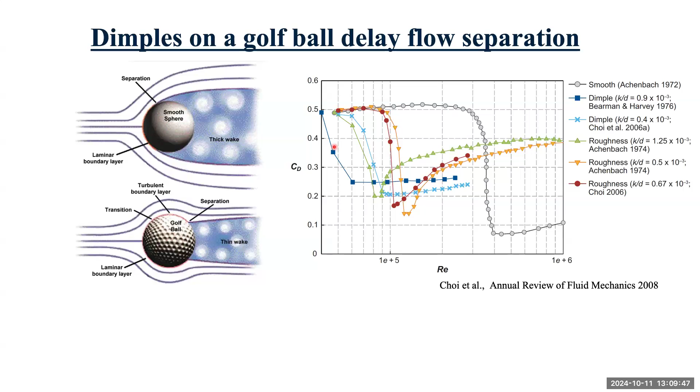So this tells us something. What it tells us is that there is no one size fits all. So if your goal is to minimize drag across a wide range of varying Reynolds number, we need deeper dimples at lower Reynolds number. And as we increase the Reynolds number, we need shallower and shallower dimples, eventually reaching a smooth configuration.

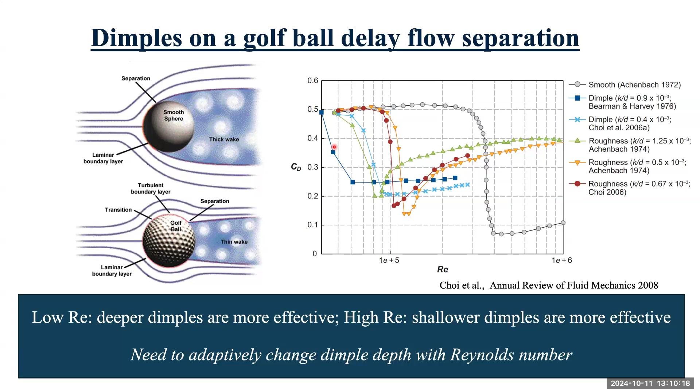But you can see here that we have only 2 data sets, and the dimple depth ratio and the coverage ratio in those 2 studies were matched with a professional golf ball. So we don't have any systematic study reporting the effect of dimple depth ratio. So we need a strategy by which we can change the dimple depth on demand or adaptively that allows us to minimize drag across a varying range of Reynolds number.

So that brings us to the research question to address. Can we develop a strategy to minimize drag on a sphere over a varying range of Reynolds number? And if you're wondering why we're interested in a sphere, it's the most basic prototype of 3D vortex shedding. It has adverse pressure gradient, and you have massive flow separation.

And this is one of the prototypes that the academic community uses for most of the fundamental studies. So we will look at a sphere and see if we can develop a strategy by which we can change the dimple depth on demand or adaptively with flow velocity.

So when I was thinking about this idea at MHL, you might have also noticed there was a NEEX project going on, advised by Professor Mackey, where they were looking at ice breaking.

And you would see those pickleballs that they were using as a surrogate for floating ice everywhere in the towing tank and also in the wind wave tank. So during that time, when I was looking at those pickleballs everywhere at MHL, an idea struck my mind. So I literally took one of those pickleballs, so don't tell Nick's team here or Professor Mackey, and I went to the dollar store and bought a balloon, literally a balloon, a syringe, and a tubing.

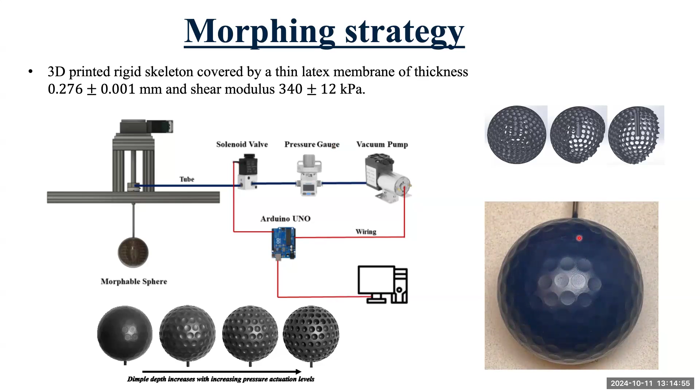So here, what we are seeing is as you increase the depressurization levels, the dimple depth increases. And then in the video on the right, you're seeing that when we increase the depressurization, there were dimples, deeper dimples, and then we released the vacuum pressure, it reverts back to the smooth configuration. And this might look, in theory, really easy to fabricate, but this actually requires a lot of meticulous attention to detail and precision in hand. And that's where Nanda came in, and then he fabricated these models.

Okay, so now we wanted to calibrate this so that we can relate how we can change the dimple depth precisely with the pump activation time here, which is for how long the vacuum pump is on. So we used a 3D laser scanner with a resolution of 5 microns from Professor Steve's lab. And then we have now the calibration. And then by setting the pump actuation time, we can precisely control dimple depth. And here, the precision that we could achieve in dimple depth was 0.01 millimeters.

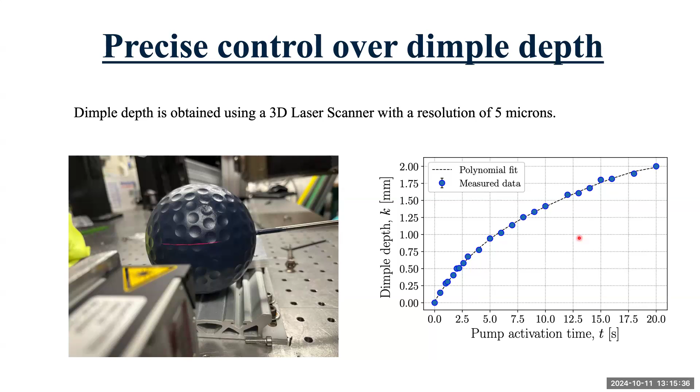So once we had our morphable sphere version 1.0, there will be several versions throughout the talk, we were ready to test it. So grateful to the University of Michigan Aerospace Engineering Department who gave us access to the wind tunnel. So we tested this morphable sphere in the 2 feet by 2 feet subsonic wind tunnel at GFL Labs, where the flow speeds could be varied from 5 meters per second to 22 meters per second. So that gave us Reynolds number varying from 60,000 to 130,000. It's not as big as we would like, but that's the experimental limitation that we had.

And then we varied this dimple depth ratio from 0 to 0.01 in increments of 0.001. And we kept the dimple diameter ratio, so the diameter of the dimple to the diameter of the sphere, fixed, and we matched it with Choi et al. 2006, which is also matched with the real golf ball. And the dimple area coverage ratio in this case was 55.6%. And we did simultaneous force measurement and near wake measurements. We employed 2D particle image velocimetry, and we were looking at an equatorial plane, which was passing through the center of the sphere.

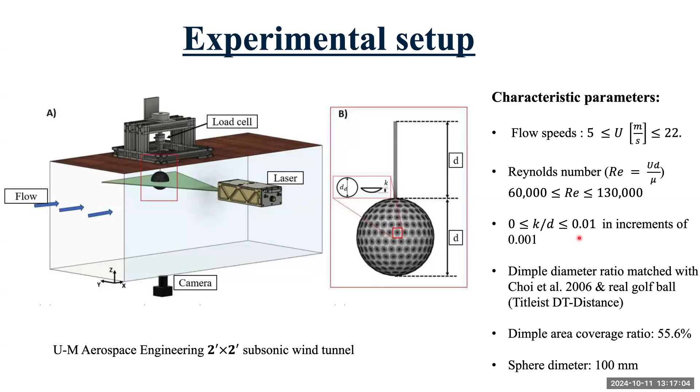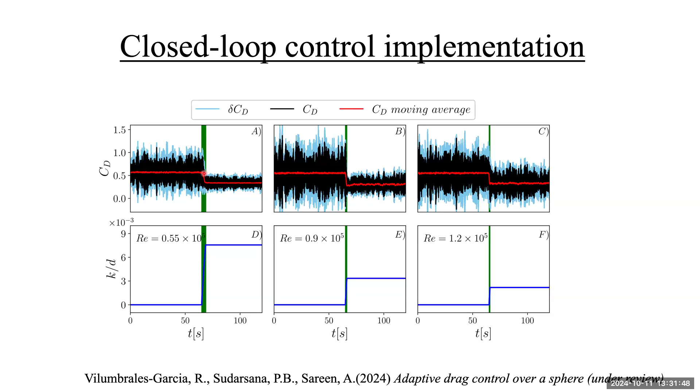Here, how do you know what k/d to use at a certain Reynolds number? So the question was, how do you know the optimal k/d for a certain Reynolds number in this implementation? That comes from this model that we programmed in Arduino, and for this we need to know the Reynolds number. I see. So you performed the experiments for different values of the roughness, from which you extracted the optimal value? Yes, this predictive model. Then you're using this optimal value for the control loop implementation? Yes.

So from the systematic study, we identified the optimal k/d as a function of Reynolds number to minimize drag. This is the control model you need to implement closed loop control. From here, the flow control community can take over. They can stick a pitot tube; whenever there's a velocity change, they will know the velocity and Reynolds number, program this control model in their closed loop approach, and know what k/d to actuate. Because this approach is validated, we know for every k/d what depressurization level we need, so the morphable sphere would actuate that particular k/d.

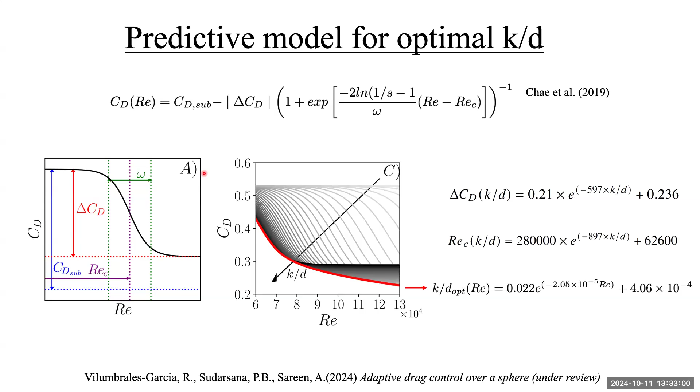So to summarize what we have learned so far, we developed a smart morphing strategy here that allowed us to adaptively change dimple depth with changing flow velocity and also on demand. And we used that to systematically study the effect of dimple depth ratio. And we found that as you increase dimple depth ratio, the critical Reynolds number where you see drag crisis decreases, but the minimum drag coefficient achievable in the post-critical regime actually increases.

And then we used that data to develop a predictive model to relate optimal k/d as a function of Reynolds number to minimize drag, and then used that model in a very proof of concept closed loop control approach over a sphere. So here I've just scratched the surface. This paper is under review, and you can look up the arXiv for more details.

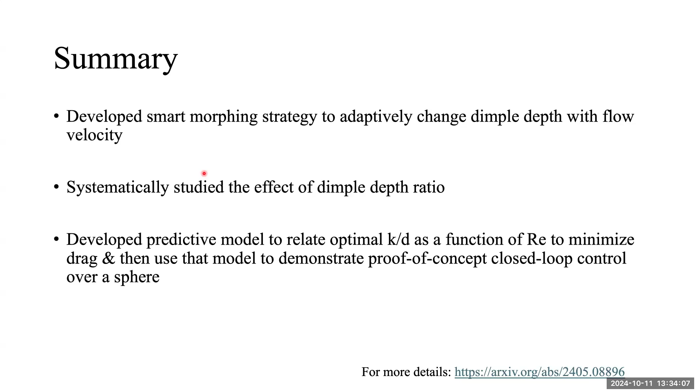So at this stage, we have a toy model at hand, and the team was very excited. What else can we do with it? So the one question that came to our mind was, can we generate lift using this morphing strategy? So in order to start that, I will first ask you, audience, have you seen instances around you where you see lift being generated on a spherical body?

Yes. What are those? Like the insects, when they're flapping their wings, and the birds, they morph their wings, so they generate the lift on the vortex. Yeah, so that's a good mechanism of generating lift for that specific shape. I'm asking about a spherical body. Yesterday, in the Tigers game, there was a curveball. That's what I was getting at.

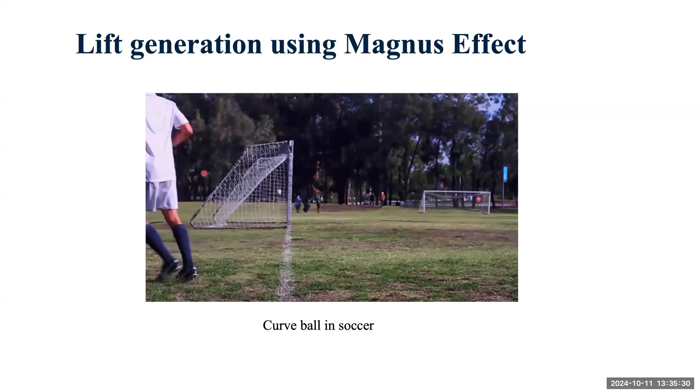Curveball in soccer, right? So we see that in sports all the time, where you impart rotation on a soccer ball in this case, and it dramatically changes trajectory, which is known as curveball in soccer. So this is known as Magnus Effect, right? And another very cool example of Magnus Effect. This video I took from the YouTube channel Veritasium. That's a really good science YouTube channel, by the way.

And what we're looking at is a basketball thrown from Gordon Dam in Tasmania, Australia. So this gentleman has a basketball and he drops it into the dam, into the river. And you see that it pretty much goes straight down with the wind. It sways here and there. And now see what happens when he gives just a little bit of backspin. It goes all the way into the river, just with a little bit of backspin. Did he go down and get it out? I guess no.

So what's happening over here? In order to look at that, I'm going to show you dye visualization videos. This is from an earlier video in a water tunnel. And we're looking at dye visualization at a Reynolds number of 5,000. We're looking at fluorescein dye, which is illuminated using a UV lamp. And alpha is a non-dimensional rotational rate.

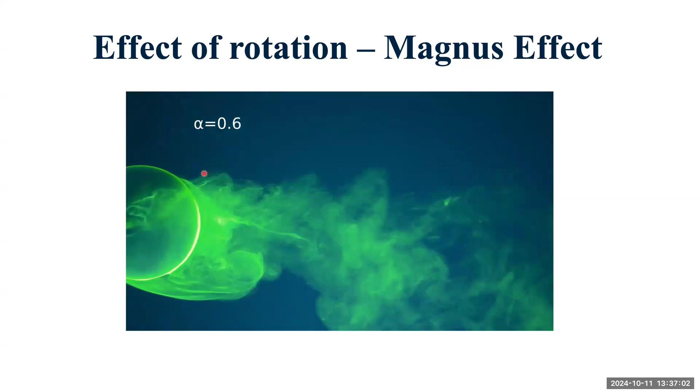So when it's not rotating, the flow is very chaotic. It's three-dimensional, right? And now alpha changes, and it's moving in the clockwise direction. So you see that the wake is deflected downwards. And when you further increase the non-dimensional rotation ratio, the wake deflects even further down. So as we impose rotation, the wake deflects downwards, so we have an equal and opposite force in the other direction. And that is Magnus Effect, and that's what you see in curveball and also in cricket.

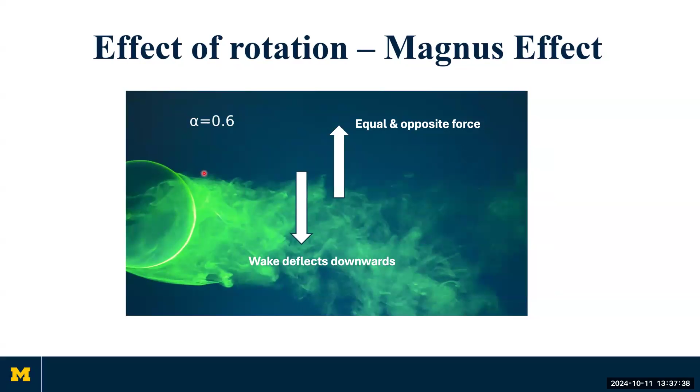So in all these instances, we are creating lift by imparting rotation, right? Now, what we are thinking about is, can we generate lift just by changing the surface texture or topology? And again, we see that in sports. So many cricket fans here? Okay, there are a few. So this is how a professional cricket ball looks, and you see it has a seam.

As it turns out in cricket, swing, which is another word for Magnus Effect, is generated just by this asymmetric seam. The optimal configuration here, from Deshpande et al., published in JFM, is around 10 to 30 degrees. Then the boundary layer that develops at the top surface because of the seam, just like the dimples, transitions into a turbulent boundary layer and we have delay in separation. On the smooth side, where we don't have the seam, we have laminar separation. So the wake is deflected this way. This is the direction of conventional swing.

And interestingly, if you have very high Reynolds number, you can also see inverse Magnus Effect or reverse swing in cricket, where now on the smooth side, the boundary layer transitions to turbulent, and then there's a delay in separation.

And on the top side, we are in the post-critical regime, boundary layer gets thicker, and it starts moving upstream. And now the wake is deflected in the opposite direction from what is predicted with Magnus Effect, and you have reverse swing, right? So we saw that specifically in realm of sports, people have looked at how this asymmetric seam would be able to generate Magnus Effect.

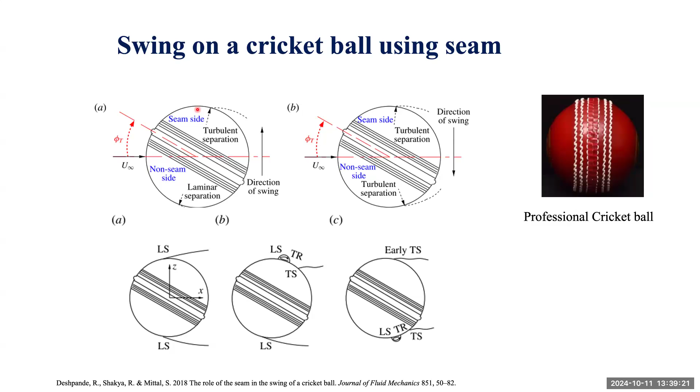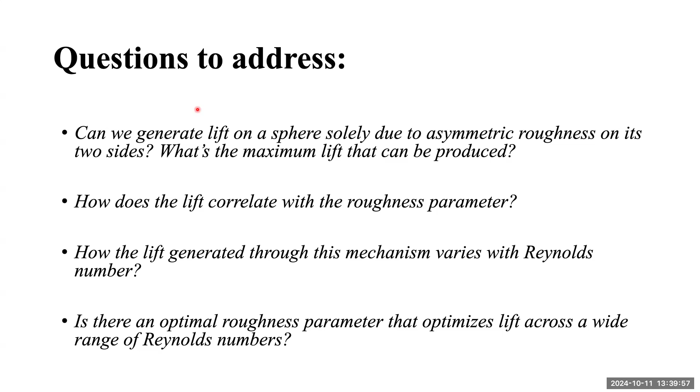So in a sense, what we need for lift is asymmetric boundary layer separation, right? And that leads us to the question, can we generate lift on a sphere solely due to asymmetric roughness on its two sides? And if yes, I mean, the studies on the cricket ball suggest we can, right? What's the maximum lift that you can produce? And how does that lift correlate with the roughness parameter? And how that lift will vary with the Reynolds number. And just like the previous study, do we have an optimal roughness parameter that maximizes lift for a wide range of Reynolds number?

And here comes Smart Morphable Sphere version 2.0. So this version of the Smart Morphable Sphere, so thanks Fernanda for this nice gift. So what we have in the skeleton, half of the skeleton has holes and half is rigid. And just like the previous time, we cover it with a thin latex sheet, and we can control precisely the dimple depth. The only difference is that we are making it rough only on one side, while the other side remains smooth. So this is very similar to that of the asymmetric seam that you see in cricket.

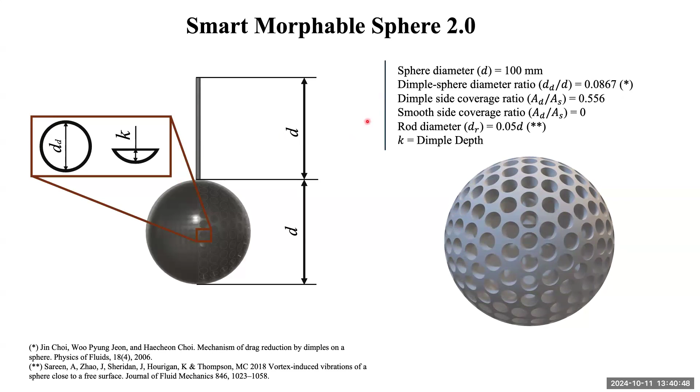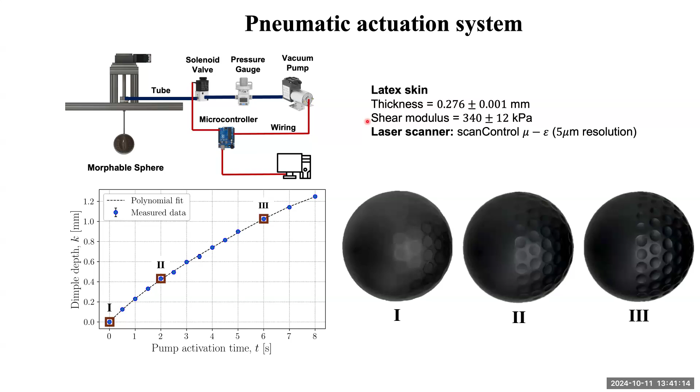And here again, the dimple diameter ratio is matched with professional golf balls. And then we can calibrate it again, just like the last time. And by precisely controlling the pump activation time, we can change the dimple depth. And then we're looking at 3 different instances. This is when you have higher dimple depth, where the activation time is larger. And just like the last time, we have a precision of 0.01 millimeters in this case.

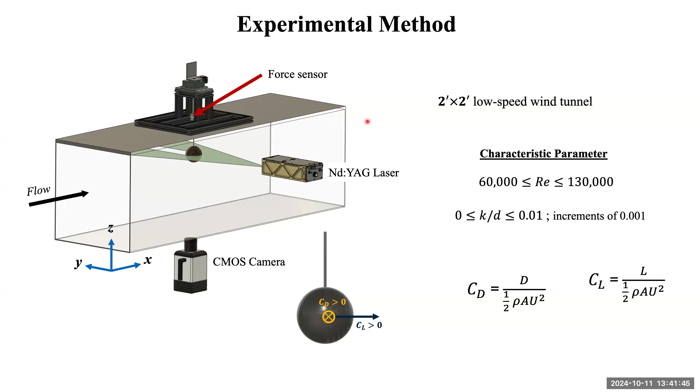And thanks to aerospace engineering department again, we got access again to the open circuit 2x2 low speed wind tunnel. The Reynolds number varies from 60,000 to 130,000, and K by D we varied from 0 to 0.01 in increments of 0.001. And we are doing simultaneous force measurement using ATI Mini 40, which has a resolution of 0.01 newtons in both X and Y axes, and near wake measurements in equatorial plane using 2D PIV.

So now let's look at what happens when we systematically vary the dimple depth. So starting off with K by D of 0, which are these symbols here. So you see that we don't generate any lift. Although at higher Reynolds number greater than 100,000, we do see slight generation of lift. And that is because for all these morphable spheres, we pre-stretch that latex sheet so that we don't see any flutter in the wind tunnel. And as a consequence, we do have small indentations, which is not significant, but at very high Reynolds number can generate a little bit of lift. But if you compare it with the lift that we can generate with optimal K by D, it's totally insignificant.

So now, as we increase the dimple depth ratio, in the direction of the arrow, we see that we start generating lift. So let's look at this cyan symbol, which is 0.002. So the critical Reynolds number is when the lift starts generating. And then we see that it monotonically increases with Reynolds number, and then it plateaus. And as we increase the dimple depth ratio, the critical Reynolds number at which we start seeing that generation of lift decreases, right? And also the post-critical lift in this case, in fact, decreases as we increase the dimple depth ratio.

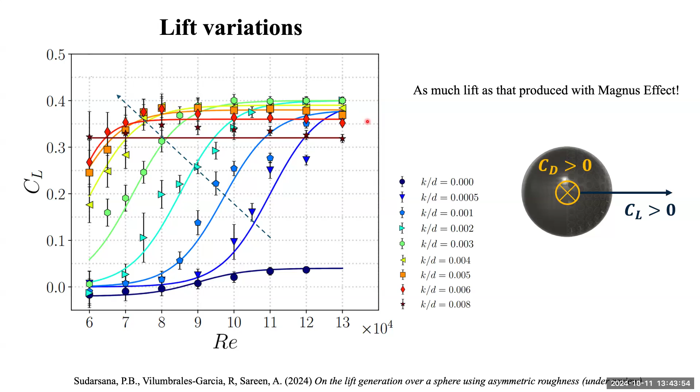So again, if we fix the Reynolds number and we vary K by D, so let's look at this 70,000 here. We see that in the beginning, for a fixed Reynolds number, we increase K by D, nothing much happens.

And then we have a sudden sharp rise in the lift coefficient that we generate, and we can monotonically increase the lift coefficient. And then we reach an optimal value where the lift is maximized. But if we continue to increase the dimple depth ratio, we see that the lift coefficient starts

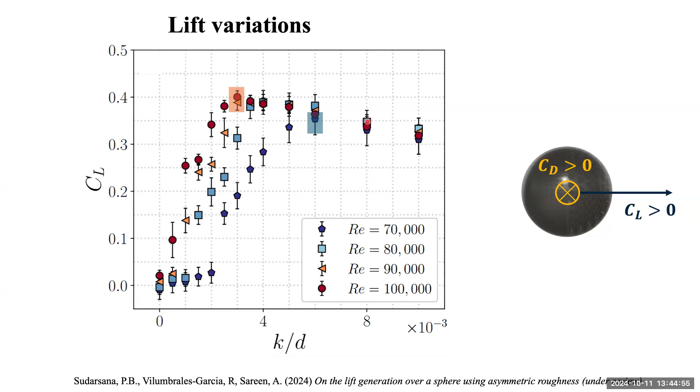decreasing. And then if we increase the Reynolds number, let's say to 100,000, red symbols here, now we start generating lift at a much lower dimple depth ratio, and we reach much higher lift coefficients. But again, if you increase K by D, you start decreasing the lift that is being generated.

And in order to correlate the forces with the near-wake measurements, now we are again looking at 2D PIV measurements in the equatorial plane. So we're looking at time-averaged vorticity fields overlaid with time-averaged streamlines. And for this Reynolds number, I will put this to the side. The correlated lift coefficient as a function of K by D is also given.

And then similarly, if we look at a much higher Reynolds number now, the same effect happens at a much earlier dimple depth ratio. And the highlighted K by D is where we start seeing the maximum wake deflection and maximum lift generation. And if you further increase K by D, you start losing that lift.

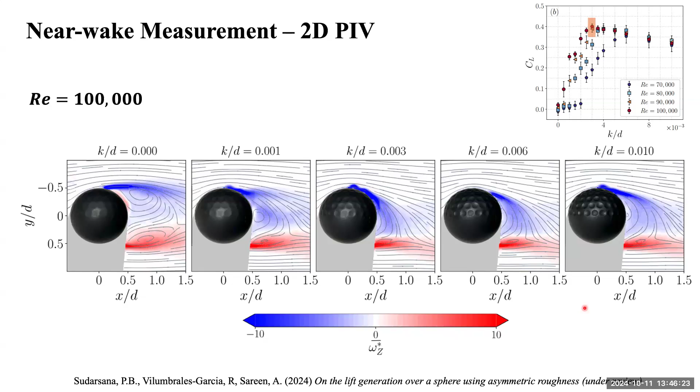And just like the last time, we can estimate the flow separation location from PIV images. And here, because one side is rough and one side is smooth, we actually look at delta theta S, which is the difference between the flow separation location at the rough side minus that at the smooth side. So the larger the difference, the larger the wake deflection.

So we see that the lift coefficient and this delta theta S, the difference in separation angles, are correlated. When the difference increases, we see an increase in lift coefficient. And then when the difference in separation angle decreases, we start seeing the loss of lift.

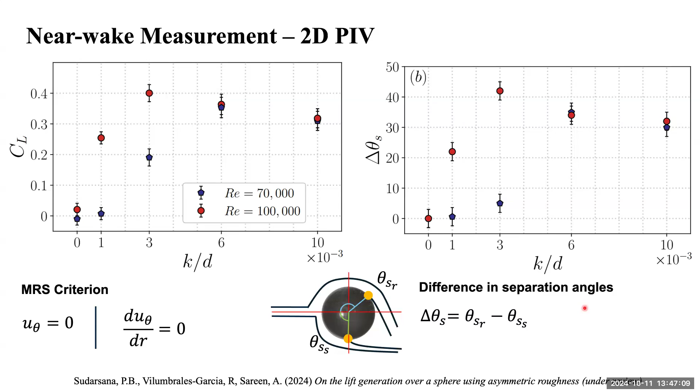And now, just like the last time, we can fit an empirical model, a parameterized logistic function here. We can extract how the critical Reynolds number and the maximum lift vary as a function of K by D. And then if you normalize Reynolds number with the critical Reynolds number and lift with the maximum lift, then we see that we collapse all the data onto a single curve.

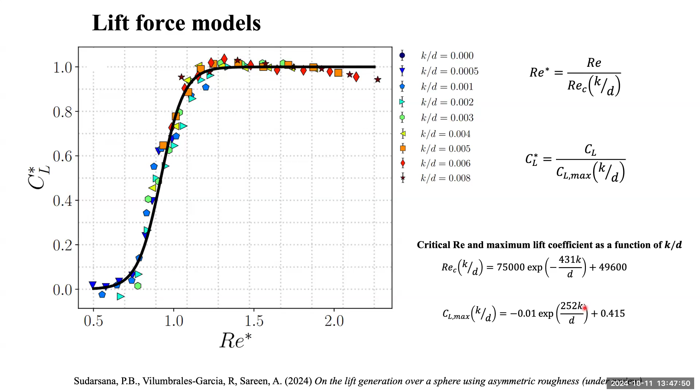And we can also extract, I'm not going into details because I've already explained that in the previous slides, the optimal K by D here again, but this time that optimal K by D is to maximize lift. And that is shown in this red highlighted curve.

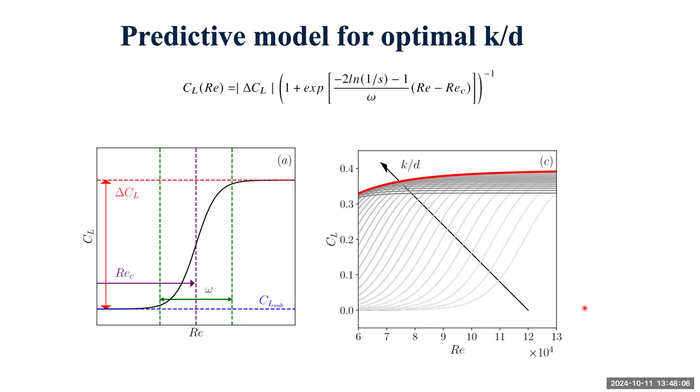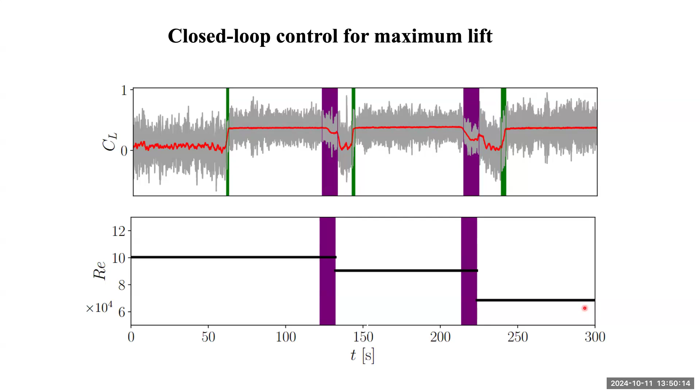So to summarize what we did in Smart Morphable Sphere version 2.0, we saw that by asymmetric roughness, we can generate lift comparable to that produced by imposed rotation, which in our opinion is a big thing. And you generate lift forces as much as 80% of the drag force. We also found that the optimal dimple depth ratio varies with the Reynolds number. So you need deeper dimples at lower Reynolds number and shallower dimples at higher Reynolds number.

And then here we leverage the asymmetric boundary layer separation on the two sides of the sphere to generate lift. We saw that the flow separation on the dimpled hemisphere is delayed, while the smooth hemisphere remains unaffected. And that led to wake deflection, leading to lift generation. So this set of study sets the foundation for applications in maneuvering for underwater and aerial vehicles.

And again, I have just scratched the surface. This paper is again under review, but it's on arXiv. So feel free to look at the arXiv paper if you're more interested.

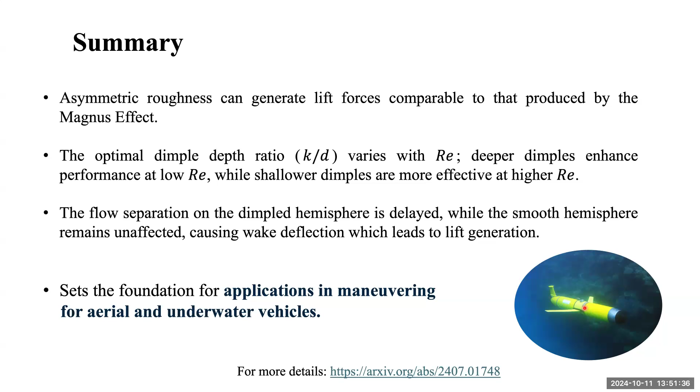So that was good. But remember, we have this Smart Morphable Sphere version 2.0. We are very happy about it. And now we're thinking about maneuvering, right? So imagine you have an underwater vehicle you would like to maneuver. One limitation with what we just did is that you're generating lift only in the direction of roughness, right? What if you want to go right?

So of course, for that, you need the ability to independently control the two sides of the sphere, so that if you want to go left, you actuate this side and you go left. You want to go right, actuate this side and you go right. And you can precisely control the lift being generated. If you want to maximize lift, you can do that.

And that's where the Smart Morphable Sphere version 3.0 comes. This is the ongoing work. We're still drafting it up, so I will not spill a lot of details here. But in this version of the Smart Morphable Sphere, we are able to independently control the two sides. And in order to demonstrate that we can generate lift on either side, we actually gave a switching frequency.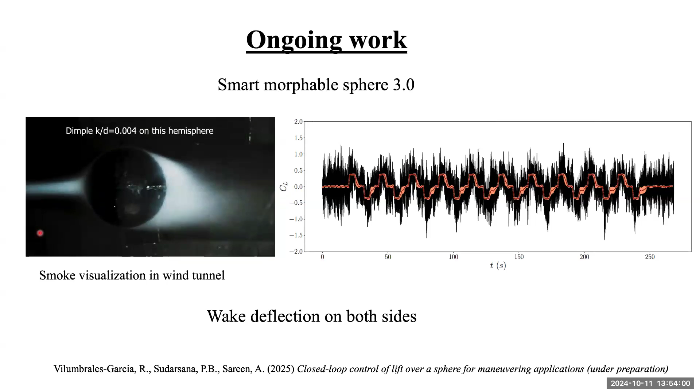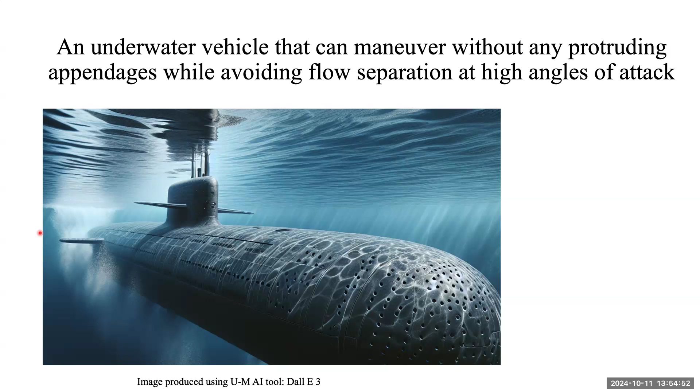And if you're fans of Star Wars, which my postdoc and the students were, they like to claim that with version 3.0, they actually developed the original Death Star.

So we're always looking next. So in the interest of time, just where we are heading in the lab. So we're now thinking about how we can leverage this smart morphing strategy in other applications. And we're looking into bio-inspired underwater propulsion, how fish propel in water. So we have a flapping foil. And one of the questions is, can we improve propulsion efficiency of a flapping foil for varying parameters using smart

morphable skin? And we have a new postdoc on board, Lokesh, and undergrad Amy, and they both are supported by the Center of Naval Research and Education at UM. And to piece everything together, we are working on fundamental fluid dynamics on bluff bodies as well as foils. And in terms of methodology, we're looking at how we can manipulate flow around these bodies to achieve a certain goal. We have looked at active closed loop, we've looked at passive boundary effects, and we are also very interested in adaptive passive flow control.

And in terms of application, we are really interested in renewable energy harvesting and enhancing hydrodynamic or aerodynamic performance of unmanned aerial or hydrodynamic vehicles. So with that, we'll have a lot of exciting projects coming up in the following winter semester when we finally have the water tunnel installed. And feel free to get in touch, and we will be hiring students. So with that, I will conclude my talk, and I will take any questions you have.

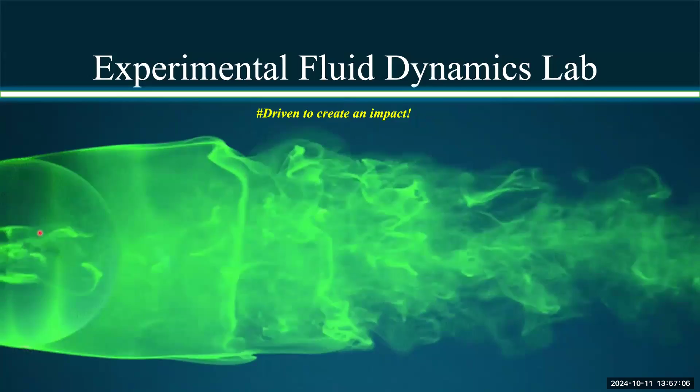Any questions? So, Professor, I have two questions. Leading to the first question, can we go back to the slide where you showed the shark skin? Shark skin in the beginning? Yeah. This one? Yes. So underneath the riblets when they lift, there is a little green vortex. Is that a vortex that creates suction?

Yeah, so that's what they reported in their study as well, that mechanism. So it's similar to flaps, so to speak, where they lift up and the flow reattaches again. And they see that they form these cavities when these micro scale structures lift up. And that's probably a vortex. Yes. So if we zoomed in on the dimples, do we expect to see the same structure in there? Is the flow doing the same? Do we have like a secondary vortex that's sucking the flow back in?

Yeah, so I will repeat the question for online viewers. The question is, when we have these dimples, do we expect a similar kind of local flow separation in the dimples? Yeah, mainly a vortex in that region. Yeah, so there was a study by Beratlis et al. They did CFD simulations and they really zoomed in and looked at what's going on at the dimple depth. We can't do that experimentally with that precision. What they found was that the flow indeed locally separates within these dimples.

And in fact, if you are in the post-critical regime, that is detrimental for drag. And the main mechanism here is that you have increased wall momentum that brings the higher momentum fluid back into the boundary layer and energizes the boundary layer. And then you have this turbulent boundary layer that delays the flow separation. So when you non-dimensionalized k over D, was D the diameter of the hole itself or the big sphere? Yeah, so the k by D that we used, D was the diameter of the sphere.